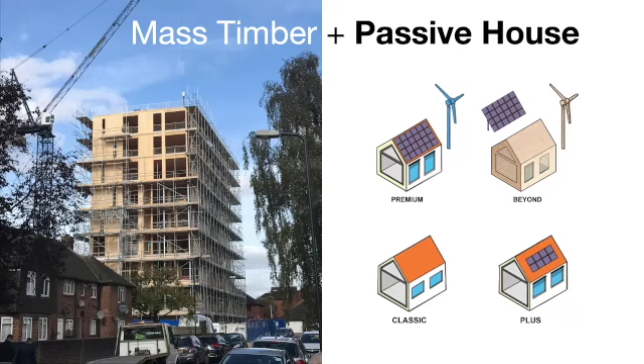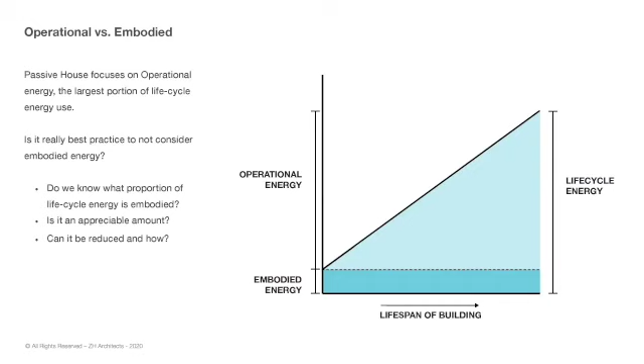So just embodied and operational energy. Passive House is very focused on operational energy, and all of the numbers that we put into PHPP, etc., are really all focused on that portion of the curve. And sometimes people criticize Passive House for not looking at the other aspect, which is embodied energy. But of course, since we're all kind of nuts about energy, we do think about it. We look at it as part of the equation, okay?

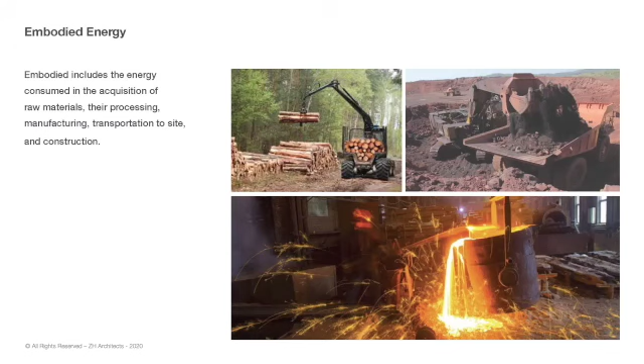So obviously, you all probably know a lot about this in terms of the embodied energy and transportation, manufacturing, construction portion of it, and end of life, right? What is done with those materials and where they go. There is obviously huge variation in those process energy requirements happening from those different materials, from wood all the way up to glass, mild steel, galvanised mild steel, and then aluminum, which is kind of off the charts.

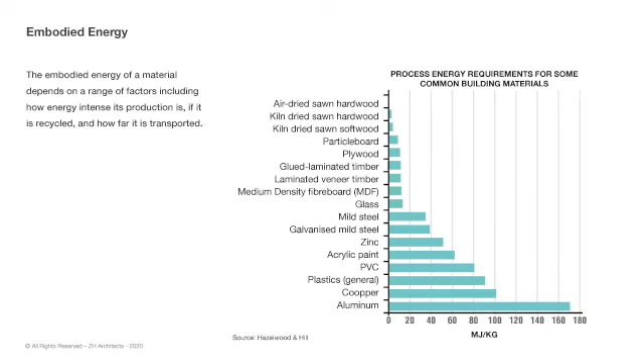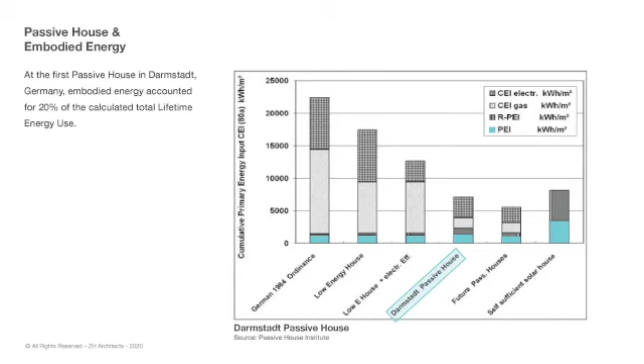So it was interesting to find out that there were some studies done when the first Passive House was built in Darmstadt, Germany, that the embodied energy accounted for about 20% of the total lifetime energy use of that project. We'll be diving in a little more detail on this, but I thought it was interesting when I started to research embodied energy a couple of years ago for these factors. And of course, there's a lot of information out there that varies. Some folks are saying it's 25%. Other studies are saying it's 43%. It really varies.

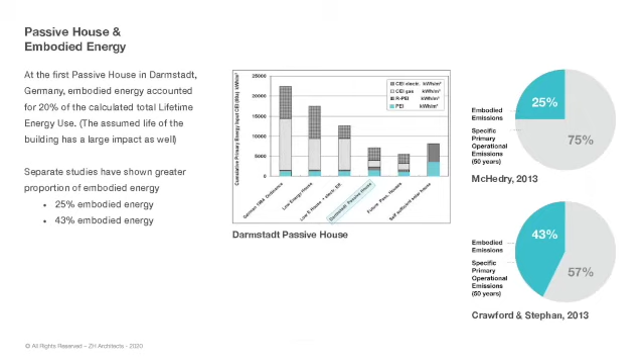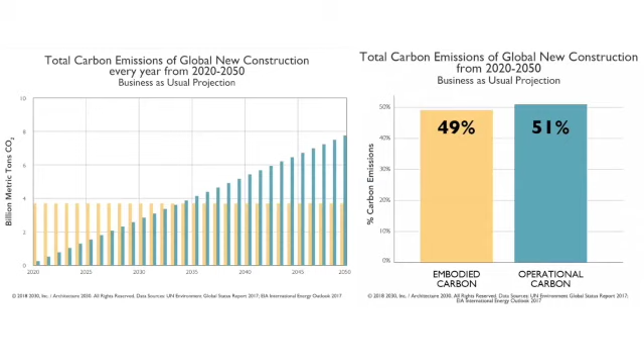Both of these studies are looking at 50 years, right? And if we look at Architecture 2030, this is probably a slide that many of you have seen. It is saying we really should be looking at embodied carbon because it's pretty much equal to operational carbon. But they're clarifying here that this is just based on a 30-year comparison. And obviously that curve is going up and up and up. If we look at the buildings we are all designing and building, apart from some temporary buildings, we will have those buildings for a lot longer than that. So if we look at that curve, well, many of us live in 100-year-old buildings. I think we should be considering the whole pie.

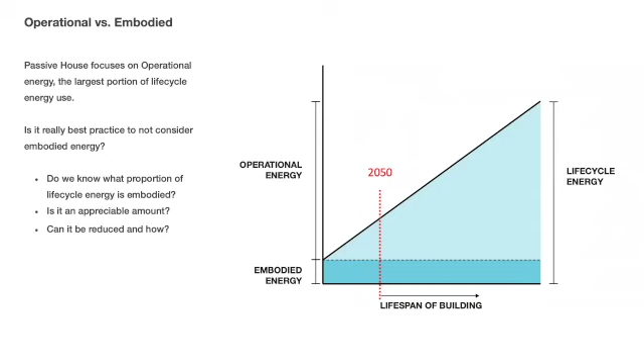So how can we address this in the designs that we're doing nowadays? We can look at passive house because it capitalizes on all of the aspects of our buildings in terms of orientation, airtightness, materiality, thermal bridges, all of those aspects. And as we go up the scale and make those buildings better and better, we only have a limited requirement to bring in renewables, right? It's no use building a terrible building and then putting a ton of renewables on it. The whole goal is to be economical in reducing that energy use of the base building.

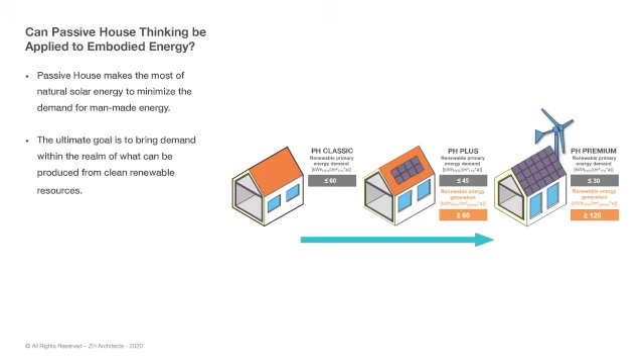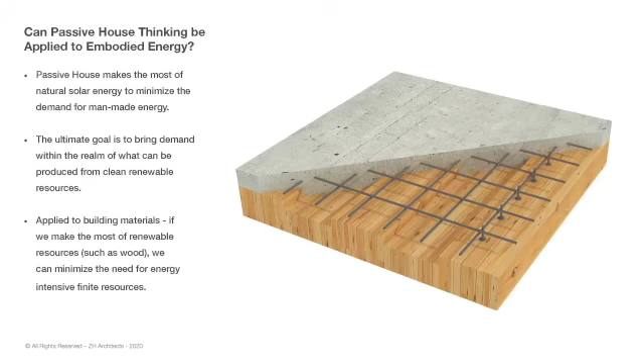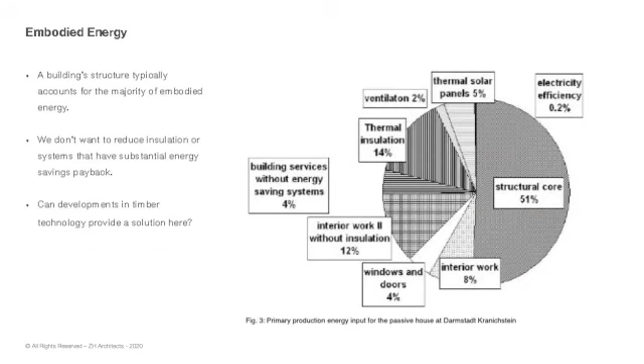So we can apply that passive house thinking to embodied energy, looking at man-made energy. Looking at the Darmstadt project, that first project built in the early 90s, the structural core of that building was accounting for pretty much half of the embodied energy, primary energy of the building. That's a substantial number. So when we saw that, we said, well, this is where these other aspects can come in.

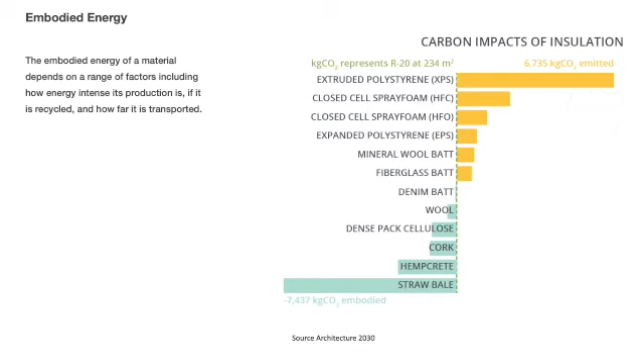But of course there are other things. This is also taken from Architecture 2030. It's interesting that they're looking at materials like wool, straw bale, hempcrete, as being carbon negative. Obviously that's a big factor in terms of the 50% of the structural aspect of a building accounting for the embodied energy of that whole building. So mass timber is a viable alternative.

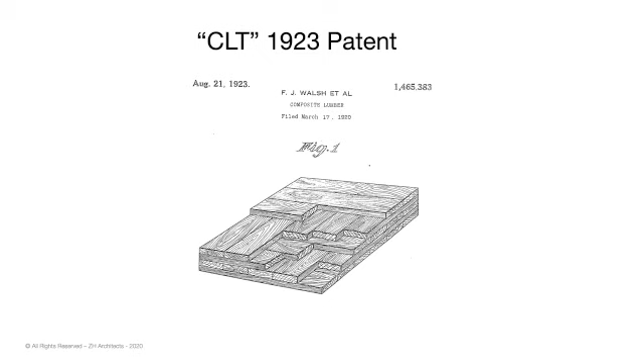This is an interesting thing we found recently. In 1923, someone looked to invent this new way of using wood lumber, and this patent was developed - the idea of taking these timbers, putting them at 90 degrees to one another, then sending them through a series of rollers that compressed the wood so they would bond. It was interesting to see this as a typology, though I guess it didn't really take off back in those days.

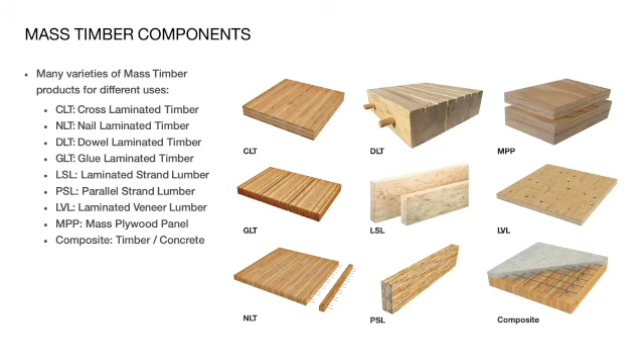Nowadays, mass timber is really referring to all sorts of different products. There are composite typologies, NLT at the bottom here, which is nailed laminated timber, LVLs, LSLs, glued laminated timbers, DLTs which are dowel laminated timbers that don't have any glue, and CLT. CLT is by far the product getting the most attention, probably because of its rapid rise in use in larger buildings and larger projects. But all of these are a family of products, and new ones are coming out all the time - the MPP typology is evolving, and all of these types are evolving.

I see someone asking if the shared screen appears slightly blurry. My screen is pretty clear, not blurry at all. So yeah, we clarified it. Okay, I'll keep going.

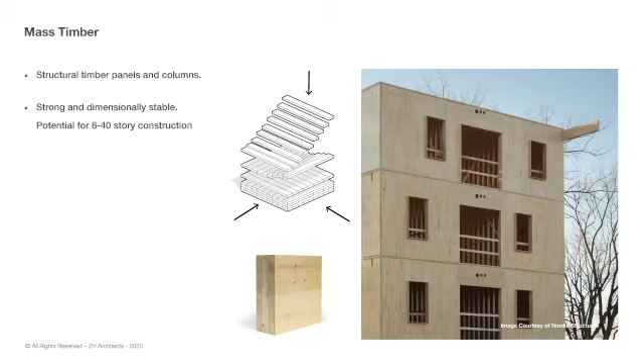So nowadays the CLT being used is a really different product compared to the 1923 invention, in that it uses glue to bond all of these different layers. There's a huge potential for structural capacity with this product, and as I was saying earlier, it was also developed in the early 90s in Austria. It's very, very efficient in its production.

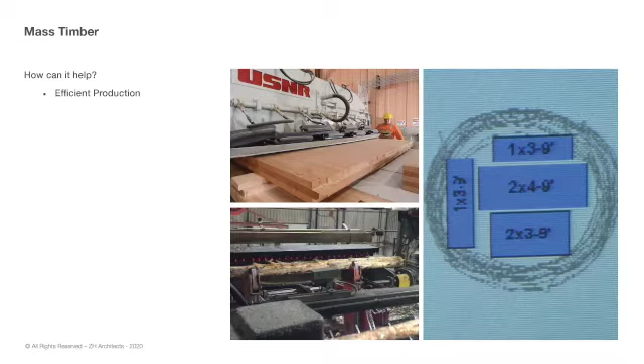This is why, based on what we've just seen in terms of this process, we have such radically different numbers in terms of the embodied energy that goes into these products. You can see how engineered wood of all types is so much lower.

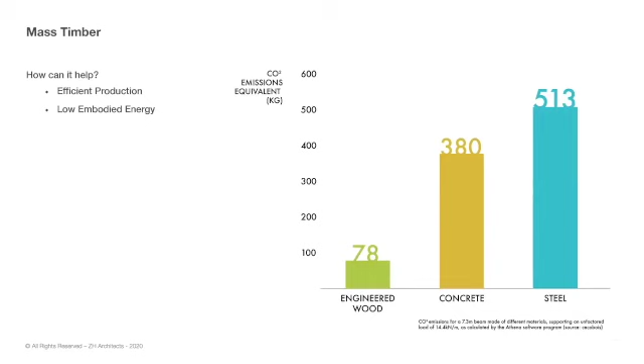Then we prepared this slide because a number of our clients were asking us about embodied carbon and how it works. We brought it down to this diagram in terms of the trees capturing all the carbon - the trees die, and then that CO2 is released.

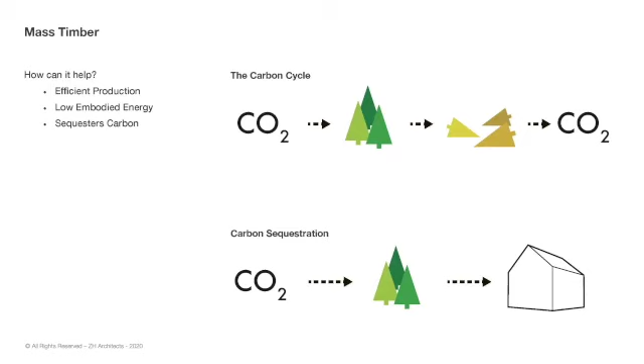What we're looking to do here is have CO2 go into those trees, and then we use those trees in construction, so we're sequestering that carbon. There's a huge difference in terms of what we're saving in carbon emissions, which is really the pressing issue of the day.

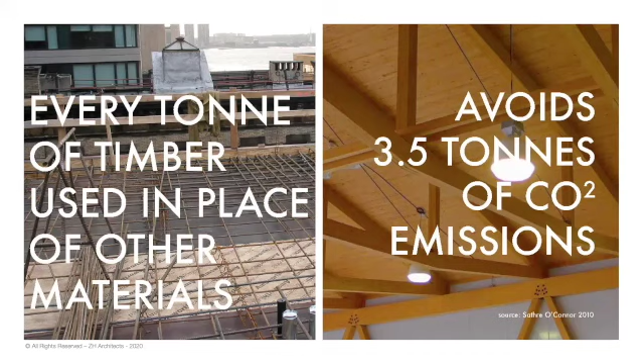If we do a passive house, we are locking into low energy use over the years, which is great, but we need to attack the big elephant in the room, which is carbon emissions right now.

So the other thing about mass timber compared to a lot of the materials we're using is its R value. It's efficiently produced, it has low embodied energy, it sequesters carbon, and it has a very high R value compared to some of the other materials we use for structure - CMU, steel, and concrete.

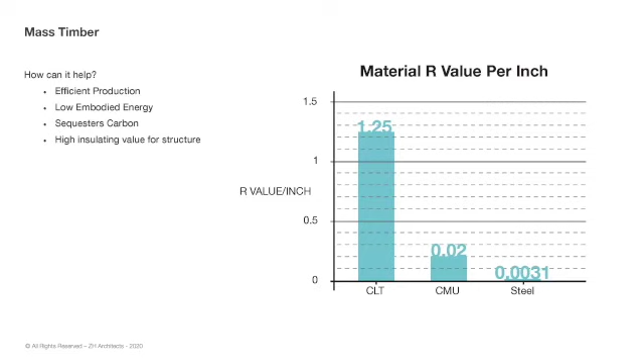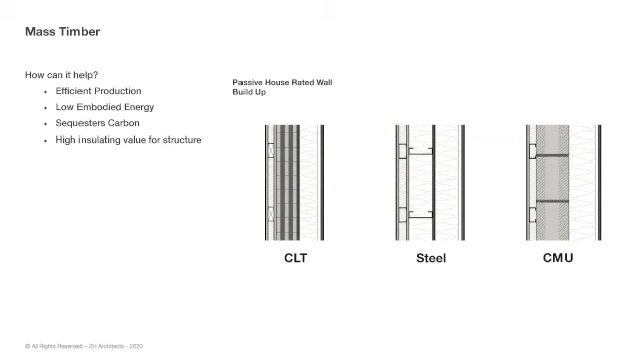If we look at our favorite passive house wall types with higher R values, we have a CMU type wall, or could be concrete, cast in place concrete with rebar, versus a steel structure or CLT. We're looking at very consistent thermal lines throughout the assemblies, and we're also looking at added R value because of these. You can notice that these CLT walls are a little bit thinner than the other ones with the same R value.

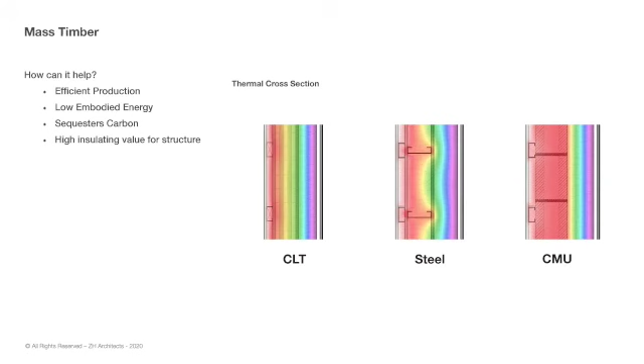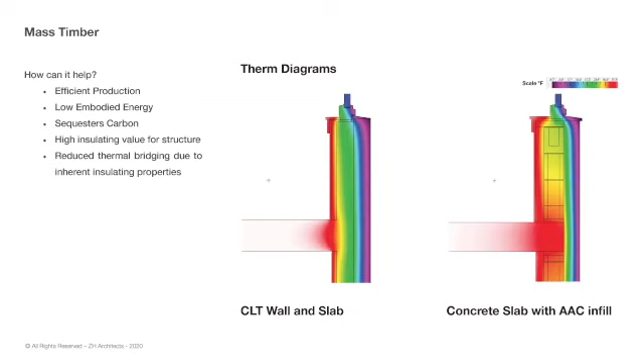In terms of therm diagrams, showing the progress of heat flow through these junctions, you have to remember wherever a floor meets a wall, you're going to have differences, and you're going to have a thermal bridge of some type. A lot of times people think of thermal bridges as only happening at a balcony or something that protrudes through insulation. But anytime that wall varies in consistency, like at a floor, you have a variation of heat flow. This diagram shows it very well.

So how much of an impact can this have on life cycle carbon emissions? We did a study a couple of years ago on a project, looking to see what the differences would be.

We were fortunate to have a project where we had two very developed sets of drawings and details for both types of structures: a concrete structure, cast in place, reinforced slabs and columns, with a shear wall circulation core, and then the CLT structure that had structural wall panels and flat floor slabs spanning all the way over.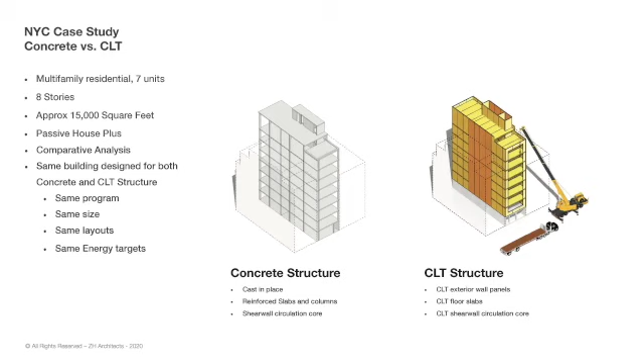I see some questions coming through. I will get to those a little bit later as we go through this.

The two different wall types - CMU, sorry, this is actually an AAC block. An AAC block has a higher insulating value than CMU or concrete, and that was used as the infill.

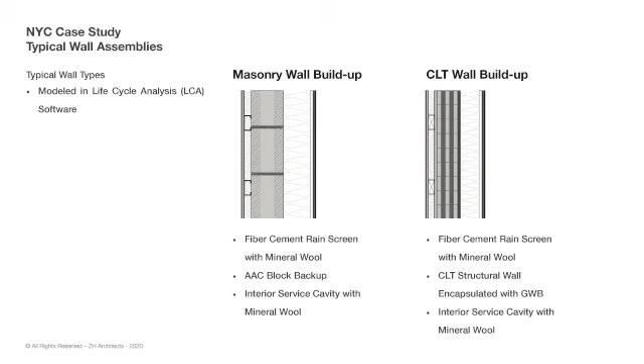So what we did is we used the Athena modeling software to model these two different types. The Athena system is quite straightforward to use - I'd encourage all of you to look at it. If it's any consolation, if any of you have learned PHPP, this is super easy compared.

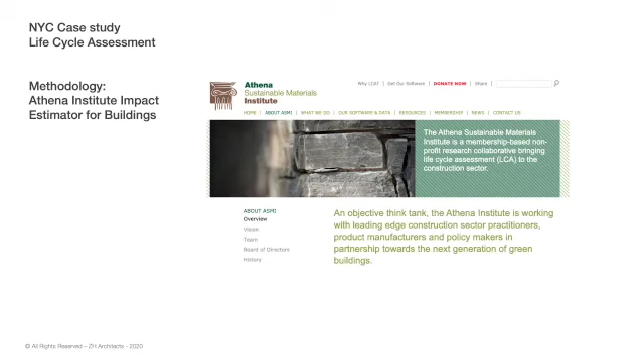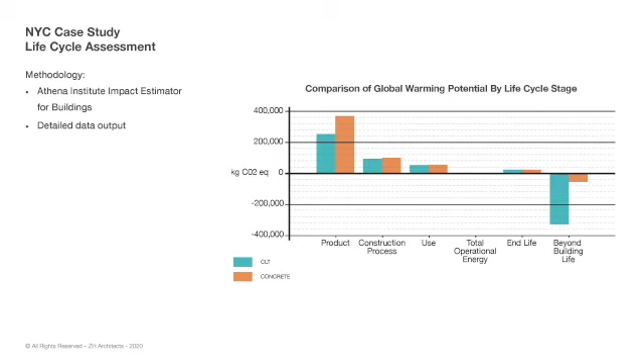It basically outlines - you put in all the data for the different buildings, for the different products that you're using, and you get the output of the different life cycle stages of your building: the product, the construction process, the use, the total operational energy, which is a separate number we get from PHPP, end of life, and then beyond end of life. And then the two categories there, the CLT and the concrete.

Interesting to look at these. Obviously in these two comparison case studies, we have the same foundations. We're assuming the same foundations for each, even though it's often the case that CLT, being much lighter than concrete, you can get away with less concrete.

But for the moment we kept it the same, just to be conservative. And then there's a very big difference in the walls, columns and beams - there are no columns and beams in the CLT, it's just the wall, the floor structure spanning over, and the floors and roofs.

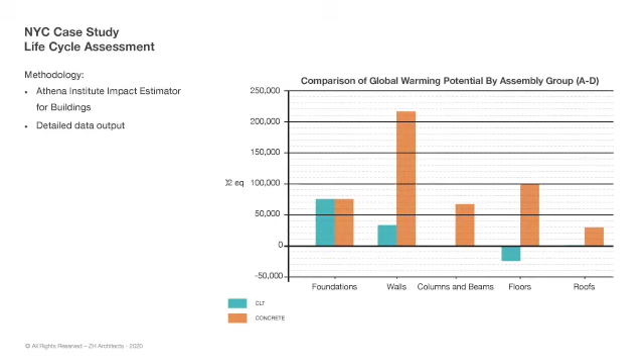Yeah, I see questions about fire ratings. I will get to that a little bit later in this.

In terms of the results of this life cycle global warming potential, we have a number of columns here showing a non-passive house and what we would get in terms of metric tons emitted in a concrete building versus a CLT building. The operational and the embodied is outlined here in terms of the light blue and the dark blue.

Going to Passive House Classic, look at that drop. This is why all of you here are New York Passive House members and interested in these typologies. And then going to Passive House Plus, which has slightly better windows, a little bit more insulation, a little bit of PV to account for that. But we're looking at a huge 93% reduction from a concrete non-passive house building to a CLT Passive House Plus. So that's a huge reduction.

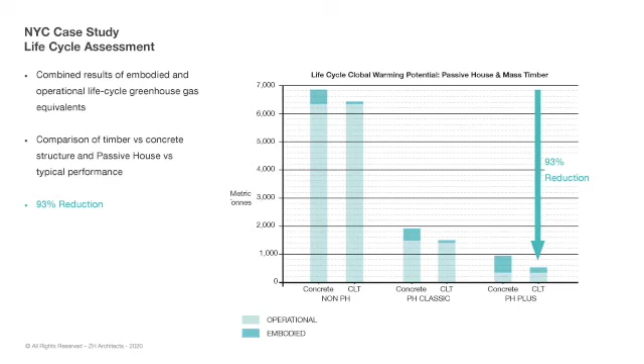This is over 80 years. I see a question here - is it over 30 years? It's over 80 years, and I'll go into this a little bit more.

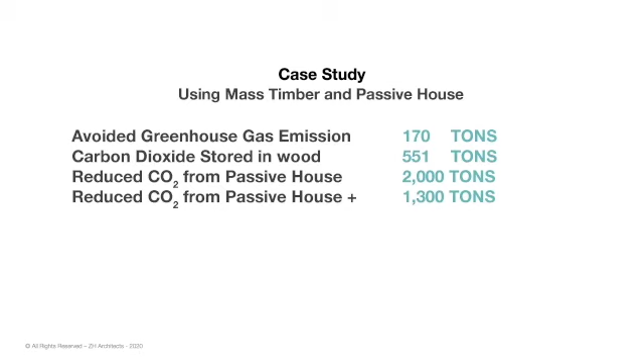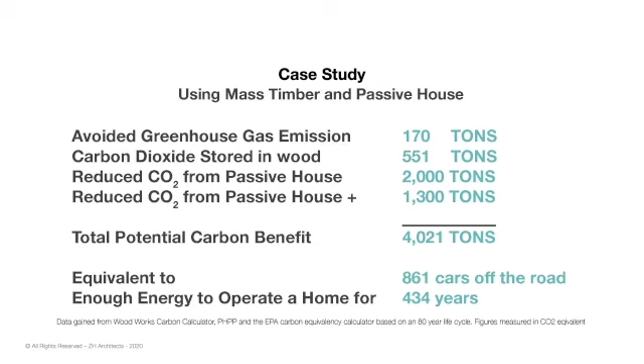So then we divided it up into the avoided greenhouse gas emissions, 170 tons, carbon dioxide stored in the wood, 550 tons, CO2 from passive house, 2,000 tons. You can see the relative differences of why it's important that we keep our foot on the gas pedal, so to speak, of doing passive houses, because overall, over 80 years, it's a huge carbon benefit. So yeah, this is all done with Woodworks Carbon Calculator, Passive House Planning Package, and the EPA Carbon Equivalency Calculator based on an 80-year life cycle.

So a lot of people are concerned about wood, and they view wood as cutting down our forests. And why should we be doing that? Well, the question is we have a lot of forestry around the world, and the truth is we're not using it very well, and there's a huge capacity there.

There are a lot of locations in Europe where their forestry is, I feel, a lot more advanced in terms of how they're using the forests, etc. And perhaps that's one of the reasons why CLT started off in Europe, so it's got a couple of years of advances on us.

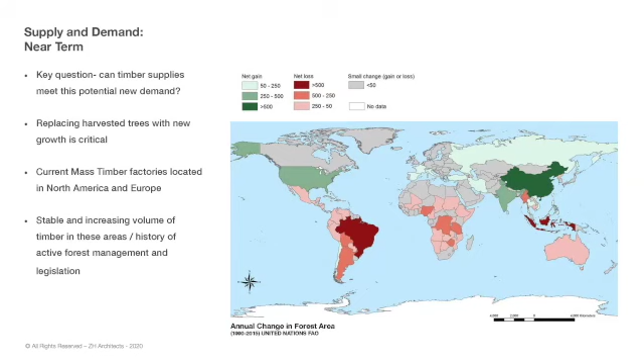Now, this is interesting - this is the Yale forestry study looking at harvesting, and approximately 20% only of the forest's annual growth potential is being used. So in this study, they looked at, well, if you increase that to 34%, that would mean quite a substantial reduction in global CO2 emissions - 14% of global emissions is huge just with this increase.

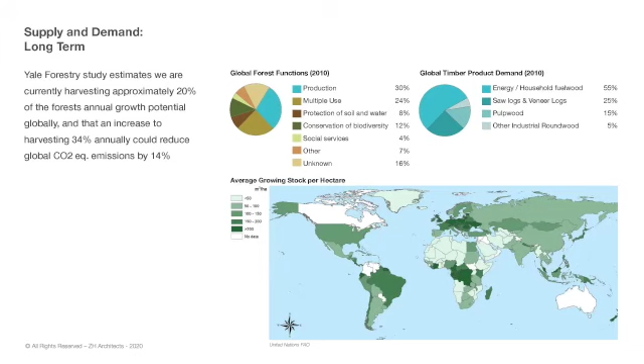And of course, with all of these things, it's really important that we look at maintaining biodiversity. So it's important that we don't just plant forests with the same type of trees, that we look at maintaining water purification and erosion control. So all of these different aspects listed in this chart are very important, and I think most important of these is that we have sustainable forest management. A lot of times today there's huge amounts of forests being clear cut for other uses, and that's a huge loss.

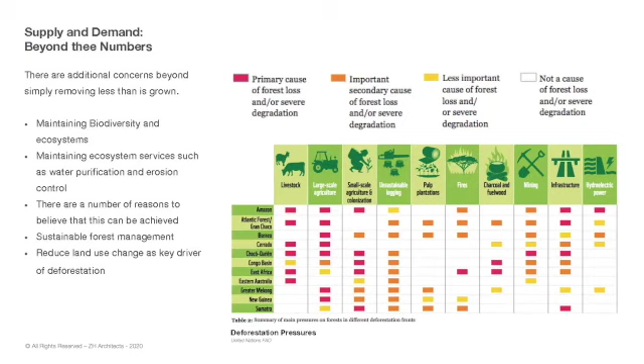So we did a presentation a few years, maybe two years back with Arup at the AIA conference, and Francis Yang spoke about this diagram, which is very interesting. It shows how the different emissions above that zero line work with a concrete design versus the sequestration or cooling with a timber design.

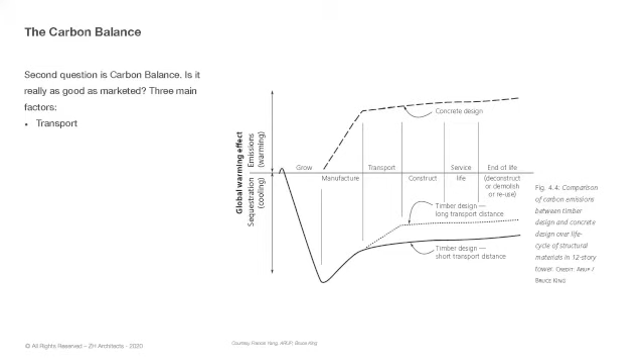You can see the growth as that tree gets older, still taking in all of the CO2 when it's manufactured. There is a certain amount of CO2 emitted, and then depending on the transportation, there's some variations there. Then of course, end of use, end of life - what happens to that building at the end? Is it demolished? Does it go to a landfill? Is it recycled? Is it reused? Incineration? All of these aspects affect the question.

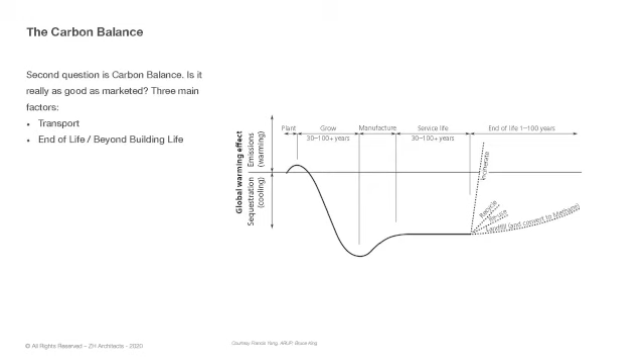So what's interesting is that if we don't sustainably source our wood, it's really not that much better than concrete, but not that much better, right? It's when you look at the delta between the timber design sequestration from proper sustainable sourcing versus the lines above the zero line, there's quite a difference.

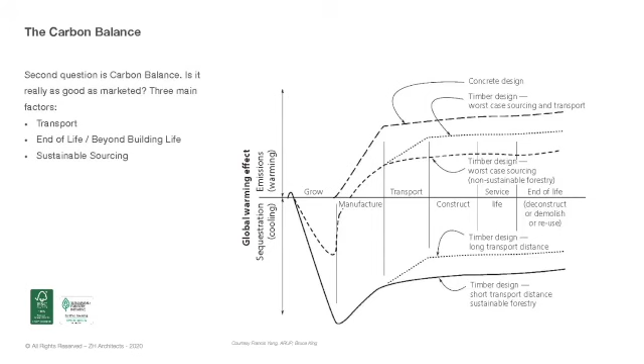Projections in the future - we're aware of the impact if we don't do anything now, and there's a tremendous potential for mass timber and other aspects to have on this equation. So this is a kind of projection that we came up with, but you can see the differences in business as usual versus the emissions peak and what we could do with mass timber.

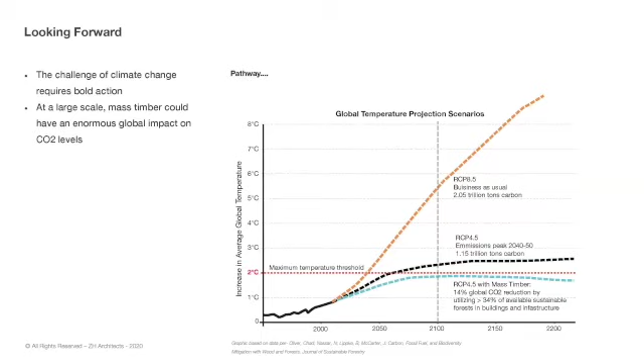So I'd like to talk a little bit about, so we won a grant to study mass timber, and we visited a number of projects in England. And in London, CLT has really taken off. So we went to visit a number of buildings that were being built. We talked to a number of architects who were building them. We met a lot of the consultants who were advising on this stuff, and they really opened our eyes to a lot of different factors.

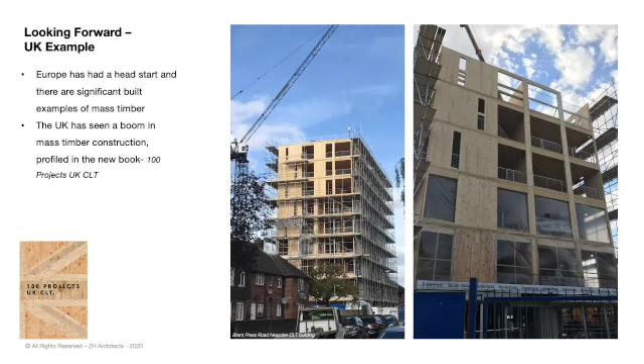So this is a building in Neasden in London. It's 9 stories - I think they were adding one more onto it, but this went up in the matter of a month or 6 weeks. I mean, it was incredible, the speed. It was super clean - this site was just unbelievable. Some of the SIGA tape that they've added to this.

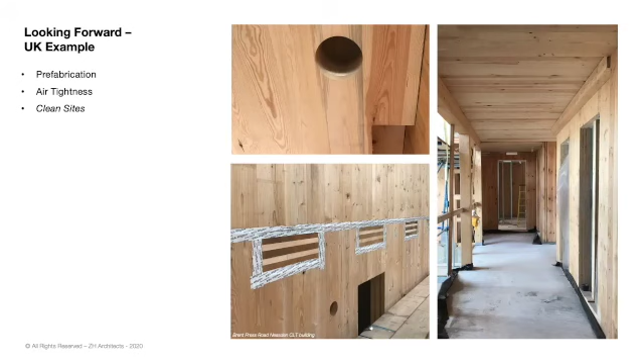And you can see the openings that were being made for the plumbing lines, and a project by Waugh Thistleton Architects. Waugh Thistleton are very, very advanced in this world of CLT and other mass timbers. And this is a 10-story building in Dalston Lane.

I think this is the largest mass timber project in the world. And it's interesting to note that it's built over a railway line. They could only build something like 6 or 7 stories in masonry, but they were able to build more capacity with the CLT because it was much lighter.

What was interesting is we toured the building, and I was in one of these units, and I was asking Andrew about, hey, do you know what air tightness this building is? I'm a passive house guy. And he said, oh yeah, we had to do that as part of the code. And it's got an ACH of 1.0. And I was like, oh, interesting that they reached a 1.0.

They didn't have any passive house requirements or anything, but they achieved that without even really thinking about it. You can imagine what they could have gotten if they had put a bit more tape or checked certain places. So it's kind of incredible what you can get. And you get that because you have this consistent wood barrier around your whole building, right? That's the way it's built, and that's the way it brings these loads down.

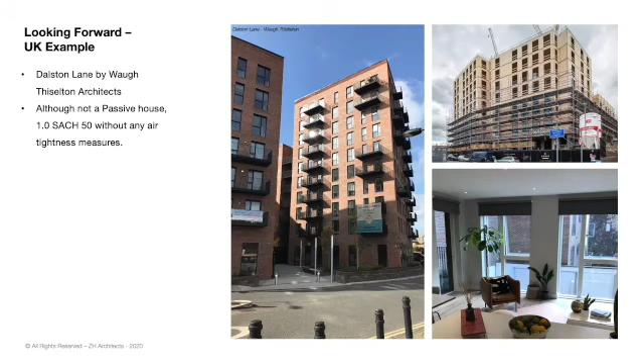So coming back to the US, there was an ad hoc committee created to investigate, with this advent of these new mass timber products, how can we change the current codes for wood, because they're behind the times, okay? So the ad hoc committee was created, and you may have heard of Susan Jones. She is an architect in Seattle, and she was selected to be part of this committee, along with fire engineers, fire consultants, and a whole gamut of people, to investigate and come up with a series of categories that the US could adopt.

This is just an image of a testing setup that was created as part of the ad hoc study to see how CLT would perform under different conditions.

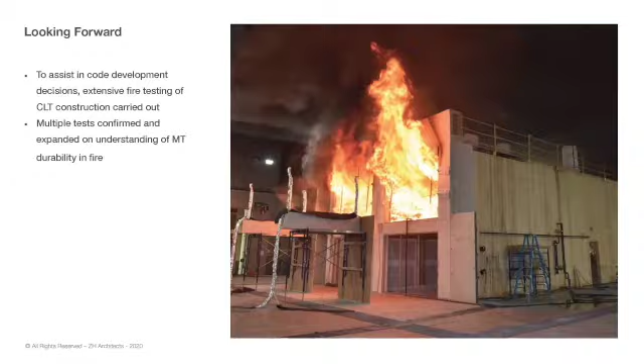So the 5 tests that were created were: the first one, all CLT surfaces were encapsulated in sheetrock.

The second test had partially exposed CLT on the ceiling in the bedroom and living room. I'll show you a photograph of the panel coming out after that test.

Then exposed CLT on the walls in the bedroom and living room. And exposed CLT on the ceiling and walls in the bedroom and living room. So those tests really had a lot of exposed CLT.

And then the last test was the same exposed CLT, etc., but the sprinklers were delayed. So they were looking to mimic a situation in which there was a problem, sprinklers didn't go on immediately, etc., and see how it would fare.

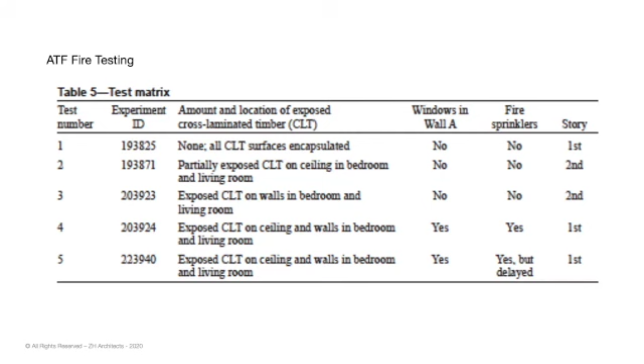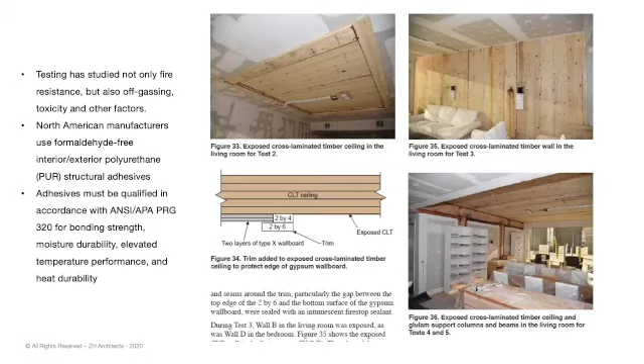So here are photographs of the results of the fire tests, and you can see those exposed CLT portions. A lot of people who show mass timber talk about why you can use it, and the principle is that the outside chars and creates a layer of carbon, and that carbon protects the rest of the wood inside. So you oversize it, building to much higher thicknesses to protect the wood inside.

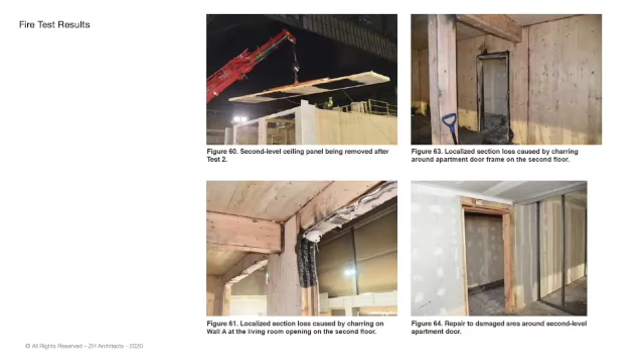The code review process was really successful. I think the testing was incredible because of the results and the fact that things didn't fall down. We've basically proven that even in situations with so much exposed mass timber, things fared very well.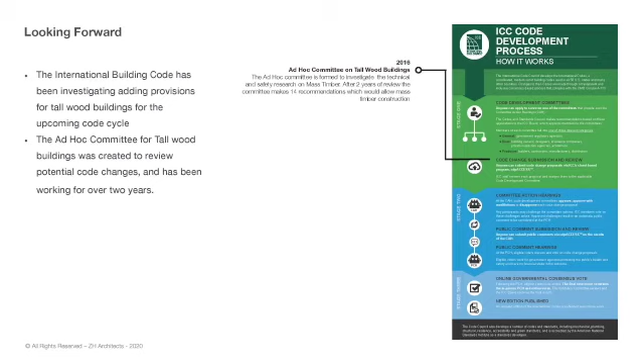And so as a result of that, the committee proposed 3 different types of mass timber codes. Using these typologies: type 4, 5 stories; type 4C is up to 9 stories; then type B is up to 12; and type A is up to 18 stories. So we're talking about variations in how much protection you would have to provide for that building.

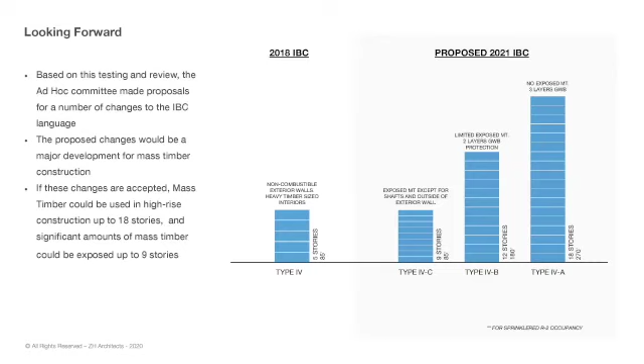So in the 9-story building, you can leave a lot of the timber exposed. In the 12-story, you can leave a certain percentage of it. And in the 18-story, it has to be completely encapsulated. So those changes were adopted and are going into the 2021 IBC.

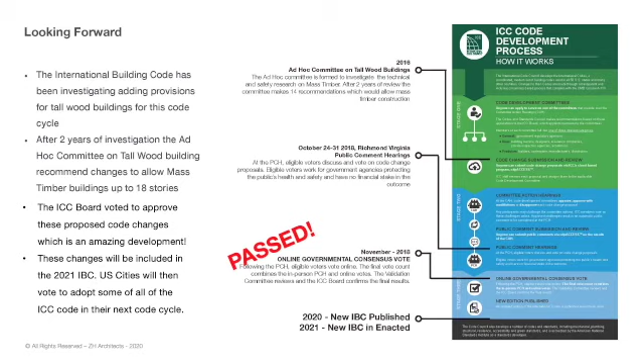Unfortunately it's not in New York State or New York City yet, but for those working in the rest of the US or other places, I think it's huge that we've gotten this far with this committee, that we have these new codes and that they're being recognized. We've come a long way in the last 5 or 6 years.

However, we have some people who don't want mass timber to happen. You've probably heard of these entities, it's called Build with Strength. I heard of them back in, I think, 2016, and at the time they had amassed $20 million to fight the mass timber community. Basically it's the concrete associations concerned with the rise in popularity of mass timber.

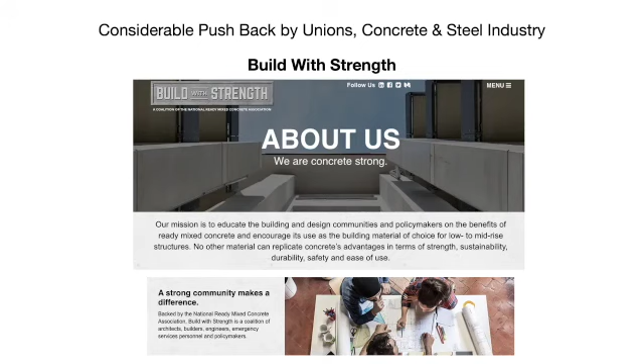Personally I think it's ridiculous, because we have so much need for construction. Concrete is still going to be used in many areas where you can't use timber, you have to build the base of a building in concrete. We're not talking about removing concrete at all, it's still going to be used in all sorts of places.

But there's a scare tactic going on, and I think it's really sad. This is what they're showing, and it's very close to us. I was at an AIA event here in New York City, and Build with Strength were showing stuff, undermining mass timber, and I think it's a problem, but it's the world we live in.

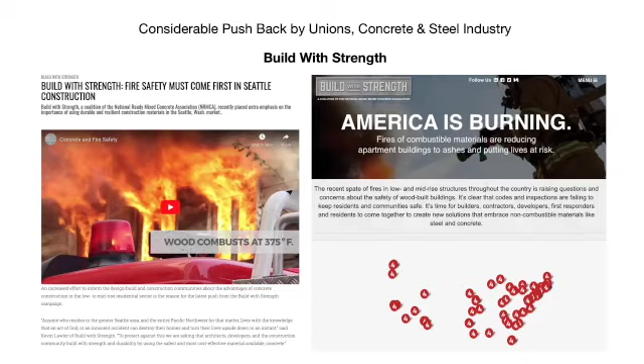This hasn't helped, the Grenfell fire, because there was no mass timber in this building. This is a concrete frame building, and as you all know, the insulation was not correctly specified, or was swapped out at the last minute, and it caught fire, and there were a number of mistakes that they made.

But unfortunately, they've changed the rules in England for the insulation and assemblies of exterior walls, and it's going to make mass timber much more difficult to build with. So that's unfortunately a byproduct of this, and there's a lot of politics when these new rules get done. Because mass timber still doesn't have enough percentage of use in different countries, even in England, there isn't enough political power to overturn these things. So I hope that they will be able to do that.

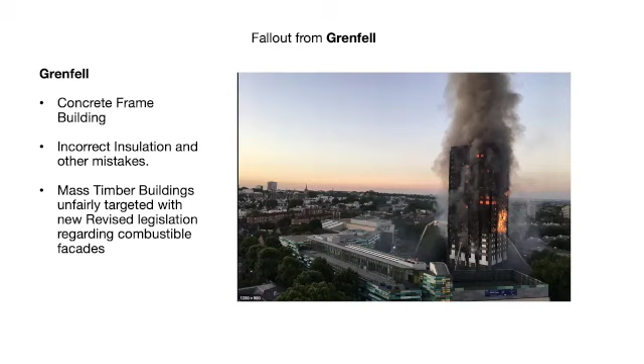So some recent developments I wanted to make people aware of: there's been a big uptick in CLT production in the US and Canada. Just the Nordic factory that I went to visit 4 or 5 years ago has suddenly gone from running at 5-10% capacity to much higher numbers.

So there's a huge increase of interest in mass timber around the US, and some states have moved ahead, even ahead of 2021 IBC codes, and have already adopted some of these code categories.

That's fantastic. Now in New York City, currently CLT is not allowed in the New York City code. However, my understanding is that there's a structural advisory committee that is including it in their recommendations, and it will be in the new code. So that's good news.

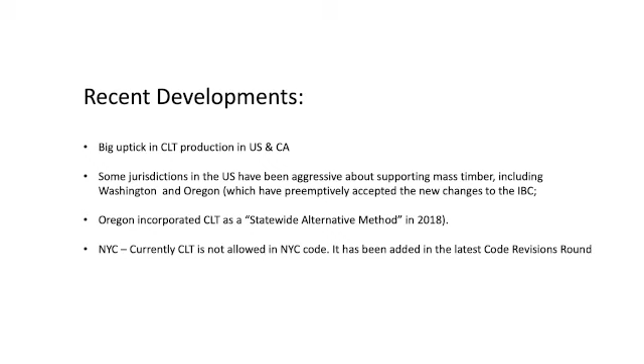NLT, nail laminated timber, has always been in the New York City code, so that is always an option that is available. And as I mentioned earlier, there's a lot of different mass timber typologies, so you can think about that. So what can we do?

One of the reasons why Andreas, Caleb, myself, and many others are engaged in policy on Passive House is that there's only one way we're going to change things - it's to get involved. I think it's really important, if any of you are interested in mass timber, to get engaged with these city officials and make them know that compared to some states, we're behind, and there's no reason why we should be.

I know that the New York City Buildings Department is very interested in mass timber, and they've been very supportive of any projects we're looking to do. There are still challenges with the fire department, and that's a big hurdle to get over.

And then embodied energy - I think it would be good if we had some sort of understanding of what the embodied energy of our buildings is, and there are places like Vancouver that are starting to account for this. We learn a lot from how other cities are dealing with these things. We learn from each other.

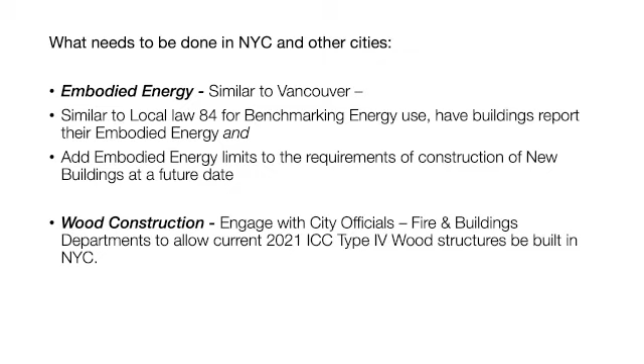My first question is, Stash, you are on the advisory board for Local Law 97 here in the city. And I think Local Law 97 is a carbon law - are you guys looking into embodied carbon or only the operational carbon of buildings?

Yeah, well, I think the law is out there for everyone to read up on. I can't get too much into the specifics of what we're doing, but I can tell you that the law is specifically geared towards operational energy. It does not account for, as written anyway, embodied energy.

That's a very good question - why wouldn't the city look into embodied carbon? I mean, I think PHI, the Passive House Institute, is certainly looking into including some of the carbon embedded in materials as well. It's an interesting discussion, but it hasn't even really hit the international building code yet, so it's an uphill slog right now. There is a bill on concrete purchasing in Albany right now that preferences lower carbon concrete, giving certain bonuses, but there's really not a huge amount of movement in terms of embodied carbon yet.

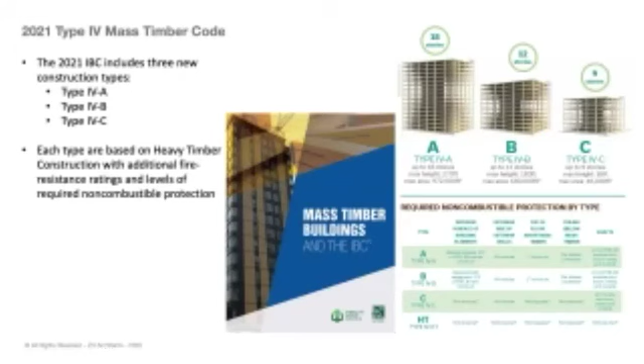Yeah, I mean, I'm always thinking, will I talk about mass timber, will I talk about passivhaus? It's interesting because I talk on both, but mass timber definitely has this attraction to it that's, let's say, sexier than numbers and passivhaus. You can see all of those images. I have questions on how all of this stuff is left exposed, and the interesting variations of what I see in Europe versus here.

There are continually so many articles on this. We notice them, and it's going to require more and more of these building types to get built to educate people, so you're right—that's a bit why I'm doing this. Gradually people will understand and see the reasoning of why these wooden buildings are safe. It's really good to look at some of these fire tests—not just done in the US, but interesting fire tests done in Europe too—because they've gone through the same process, and you realize that's not the issue with making buildings safe. That's really important.

There's another interesting dialogue happening, because some folks feel like there's a race to build the biggest, tallest mass timber buildings right now—I think we're at 24 or 25 stories. Some feel that's not what we should be doing, because it takes focus away from the sweet spot of mid-range building heights. Others say it's good, because people need to realize the extent of what mass timber can reach, so we can convince and reach more people. I don't have an opinion on who's right, but I think we need a bit of both—creating stunning taller wood projects, and also developing systems for mid-range, mid-height buildings in our cities.